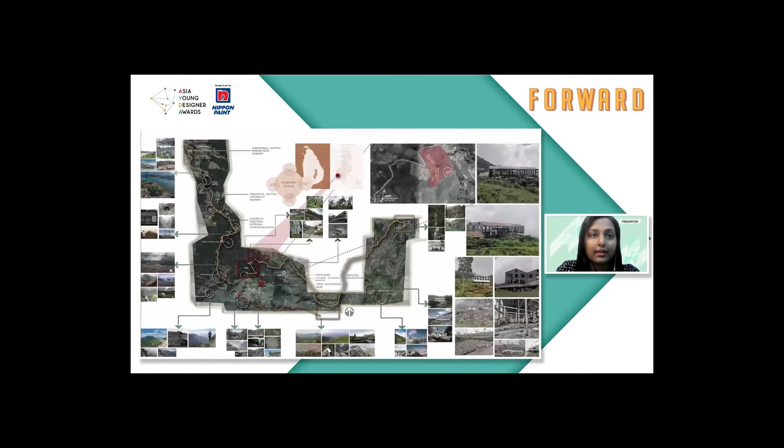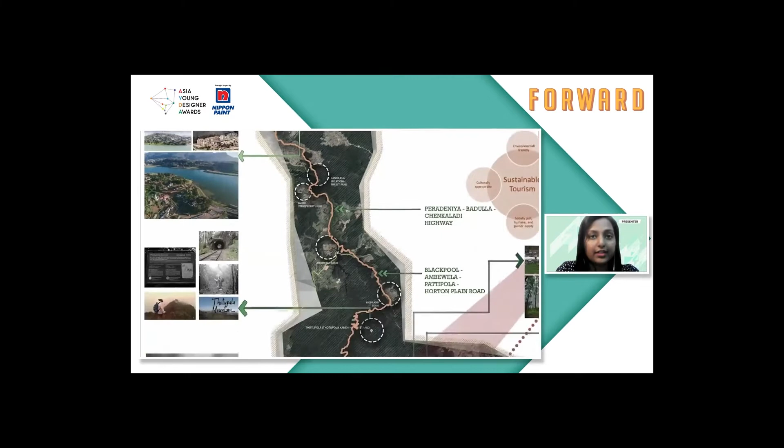The site is located in Ohiya within the Badulla district in Sri Lanka. Ohiya lies between Nuwara Eliya, Haputale, and Ella, which are popular tourist destinations. The site is located between Nuwara Eliya and Haputale and is close to Ohiya railway station, near many tourist destinations in the area.

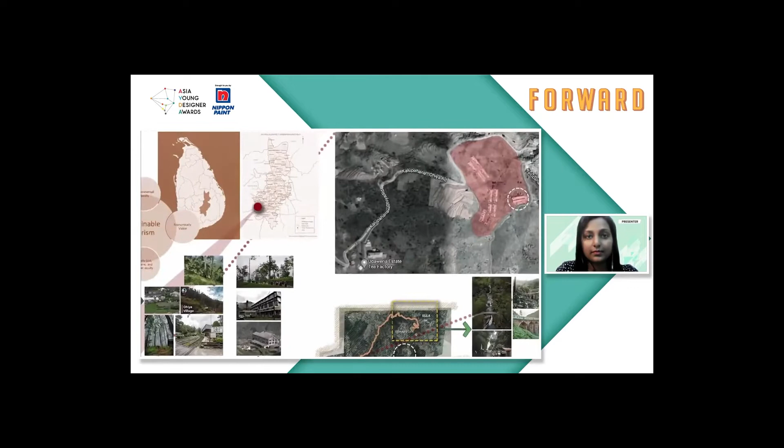The site consists of an abandoned tea factory and existing line houses. The project will be implemented and funded by Lankan Ceylon PLC and the Ministry of Plantations. Their primary objective would be to uphold the standards required to maintain the project. However, all components will be implemented and maintained by the community.

The concept of a rural biotope is implemented in the project to conserve a rural tea estate with an abandoned tea factory, following ecological and socio-cultural concepts.

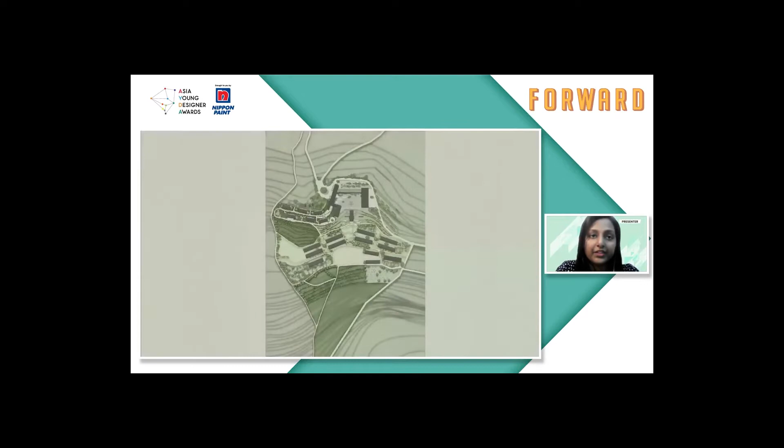The co-living community hub in Ohiya consists of three components: an upcycled tea factory, a tourist facility center with 30 chalets, and areas of existing line houses that are redesigned and retrofitted with homestay facilities.

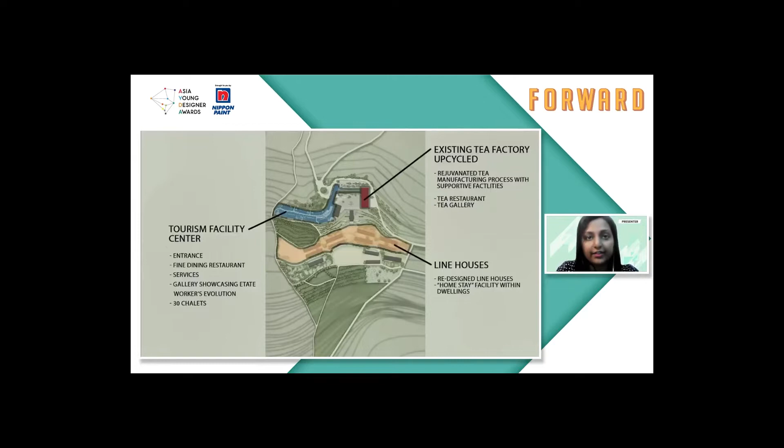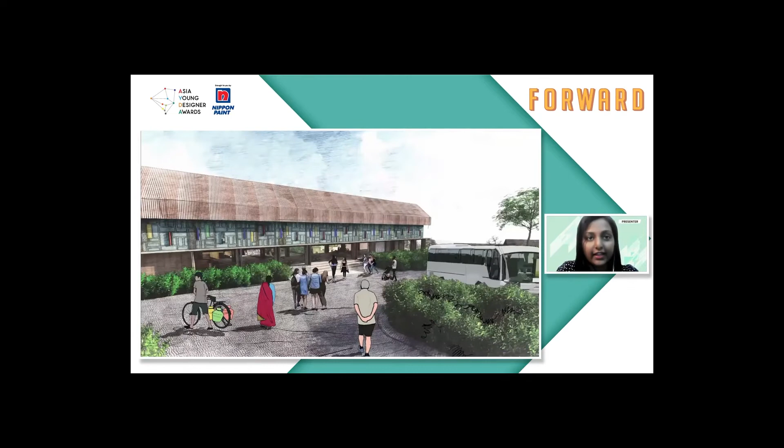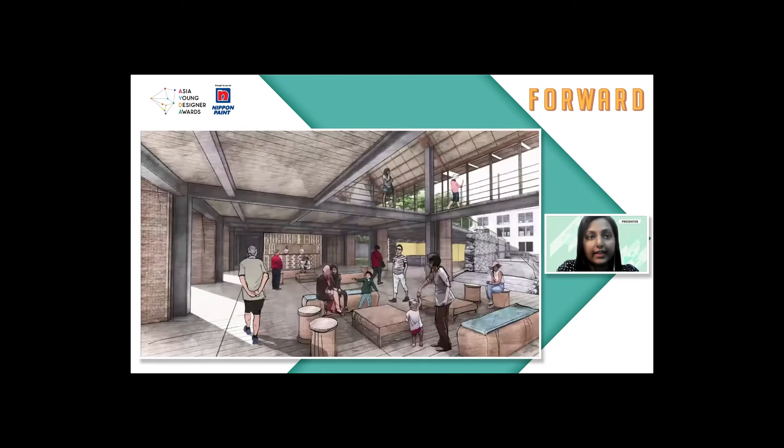The design of the building is inspired by the line houses seen in the estates. Some spatial principles followed in the design have also been derived from the existing line houses. The main entrance to the facility is through an entrance square that leads to the tourism facility center. The design provides a strong visual connection into interior regions due to the narrow open floor plan design and porous external envelope.

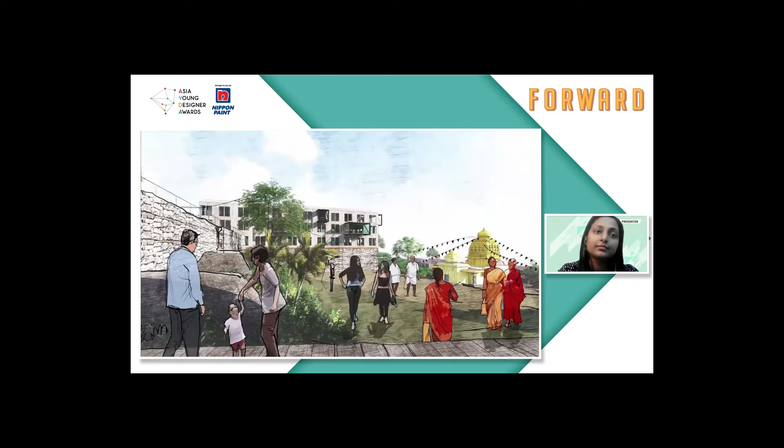The Tourism Facility Center is linked to the abandoned tea factory by a cultural gallery, which is a transition building. It facilitates a smooth transition and showcases the evolution and culture of the hidden estate community.

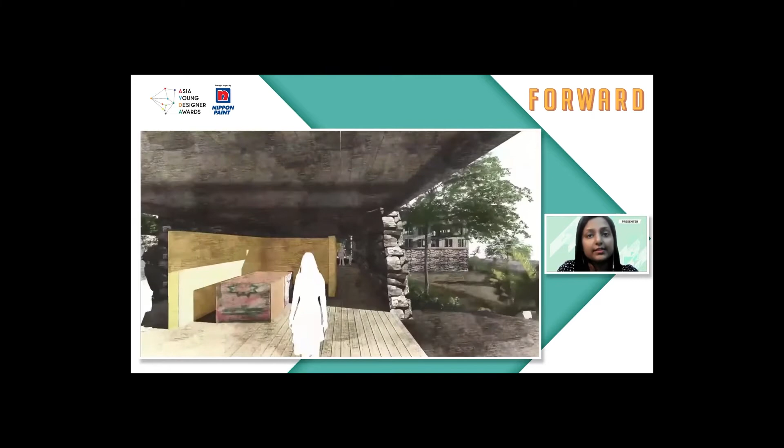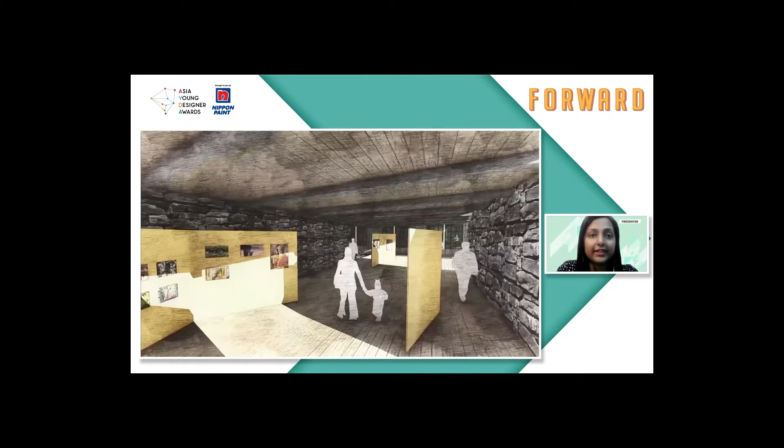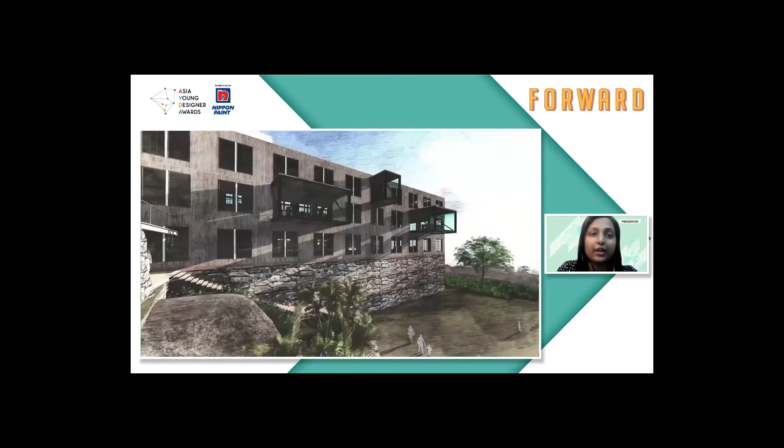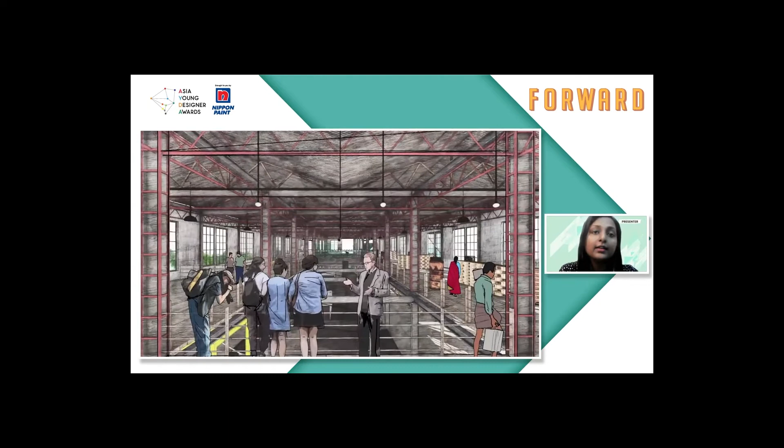The existing abandoned tea factory is upcycled into a carefully designed tea manufacturing and promoting unit. This provides visitors a museum-like experience and a safe, sound working environment for the estate workers. The feature enables visitors to experience tea production uniquely, from plucking, processing, packing, and tasting the final product at a tea restaurant. Projected boxes are included in the design to facilitate these additional spaces.

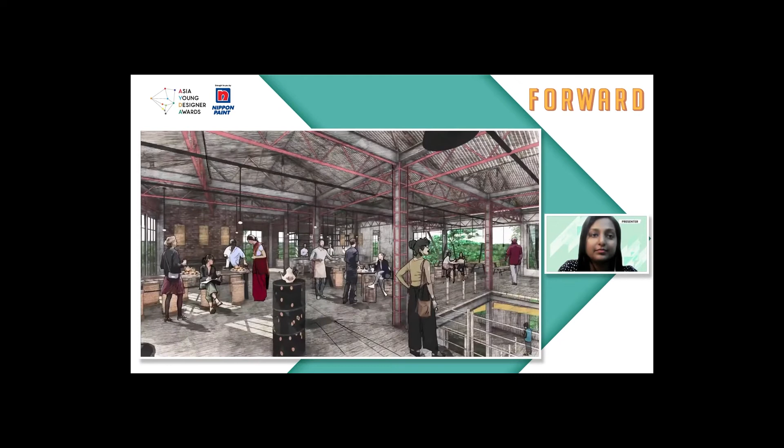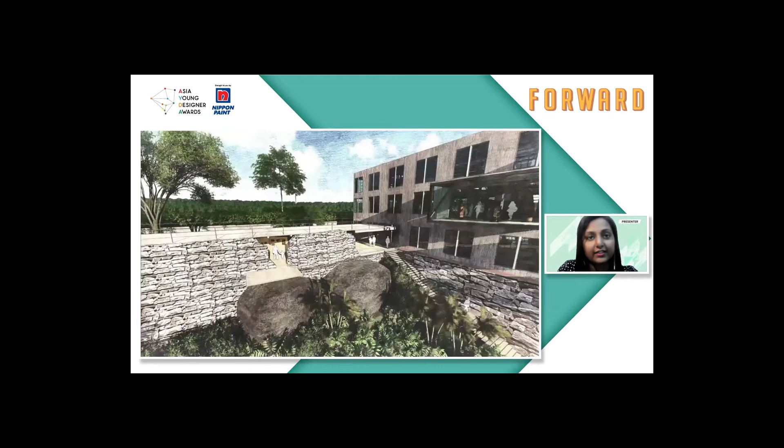The site also contains an existing Hindu shrine. This is the central design element across which public spaces are connected to each other via physical and visual links.

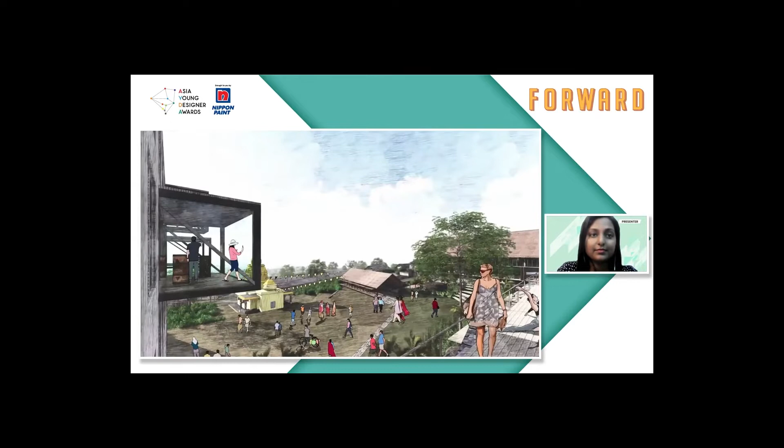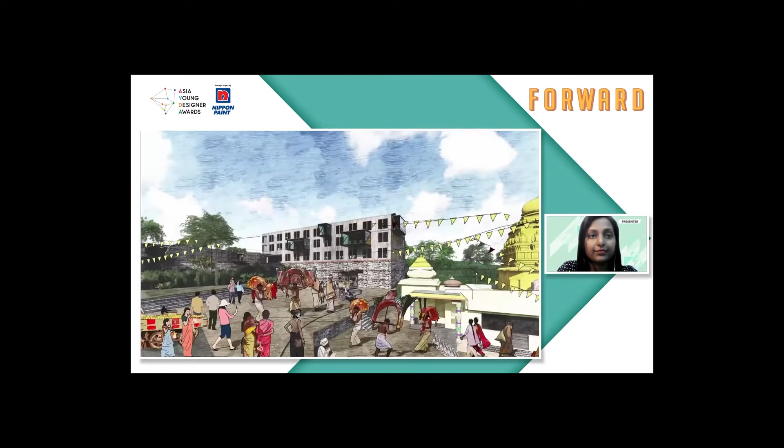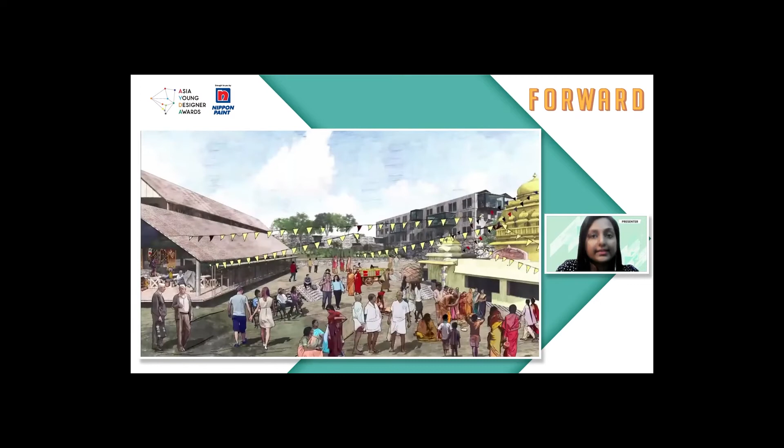The site also contains a demonstration space where a market will take place twice a week. It can also be used as a place for performances, pongal activities, etc. It can also be used by the community to engage in arts and crafts and as a space for learning activities such as cookery classes for tourists and language classes for the community people.

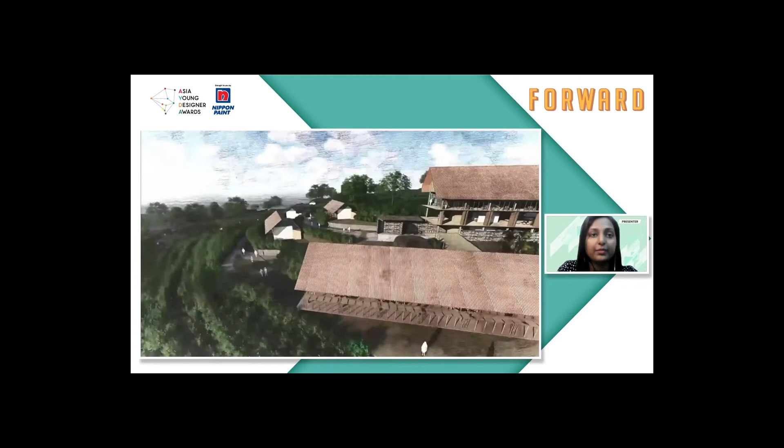30 chalets are present, forming the second purpose of the spatial provision. The cluster of chalets are carefully oriented to capture the best internal and external views of the context and provides the line house experience through its design. This can be considered the anticlimax of the spatial progression. Complementary components such as medicinal sauna and herbal spa are also included in this scheme.

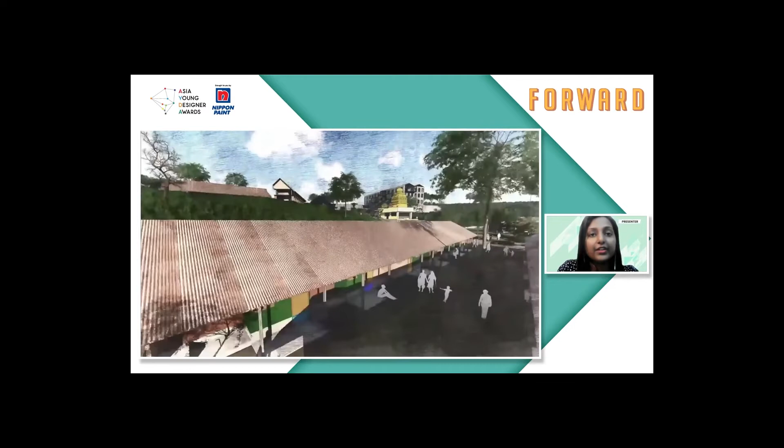Last but not least, a selected area of existing line houses currently occupied by some of the estate Tamils is redesigned and retrofitted with homestay facilities for the visitors. This will be an additional income source to the community. Spatial provision of the scheme is derived not only from the functionality of the spaces within, but also the contoured terrain and the picturesque views.

The project can form the basis for improvement of all tea estate plantations. Therefore, by emulating this concept in other areas, the tea industry will undergo an overall upliftment. This would improve export income from tea and increase the country's GDP, and most importantly, improve the lives of the tea estate community by improving their socio-economic status and standards of living.

This slide shows the color usage of the project. Vibrant colors have been used in the design to showcase the culture of estate Tamils. It gives a unique identity to the spaces and to the project as a whole. Simple colors such as black, dark brown, and gray shades balance the rusticness of the interior spaces and help create the required ambience.

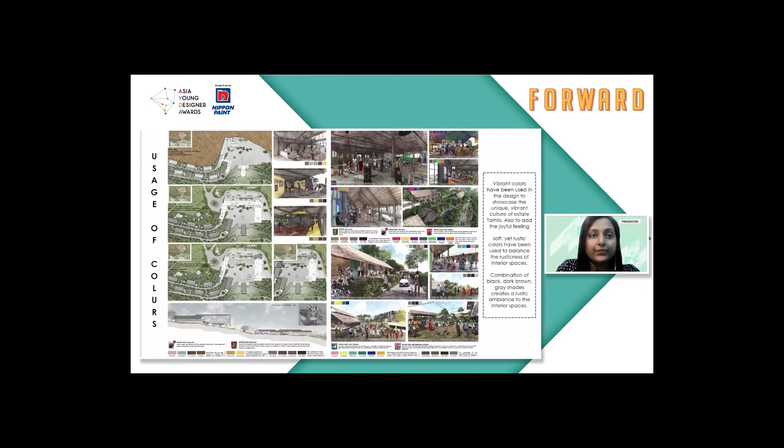This slide shows the sustainability practices that have been incorporated in the project. Sustainability approaches and sustainable concepts for services have been used throughout the process of designing, construction, and maintenance.

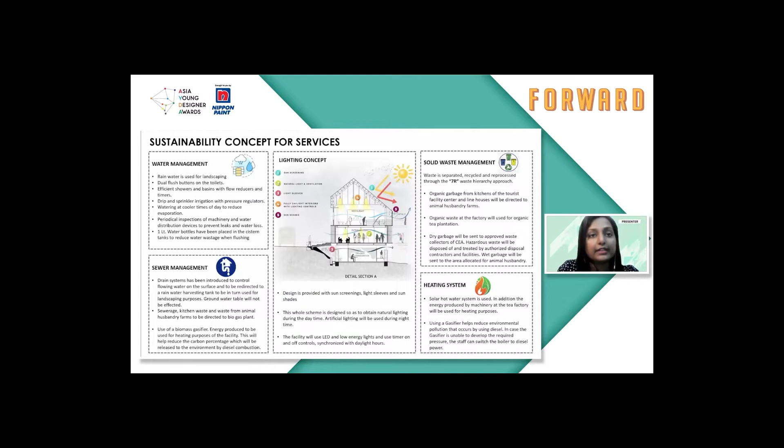The project incorporates sustainable components such as solar power generation, rainwater harvesting, a biomass gasifier, and a biogas plant. The energy generated is also provided for the consumption of the community. The project is also designed with energy-saving practices to minimize the wastage of water and electricity, etc.

The design uses locally sourced materials whenever possible, such as microtimber, bamboo, cane, lath and plaster walls, and rubber. Reused materials such as doors and windows from existing line houses have been used for decorative purposes and help showcase the estate workers' hidden struggle. Used tires and barrels have been used to build retaining walls, and railway sleepers have been used for decks.

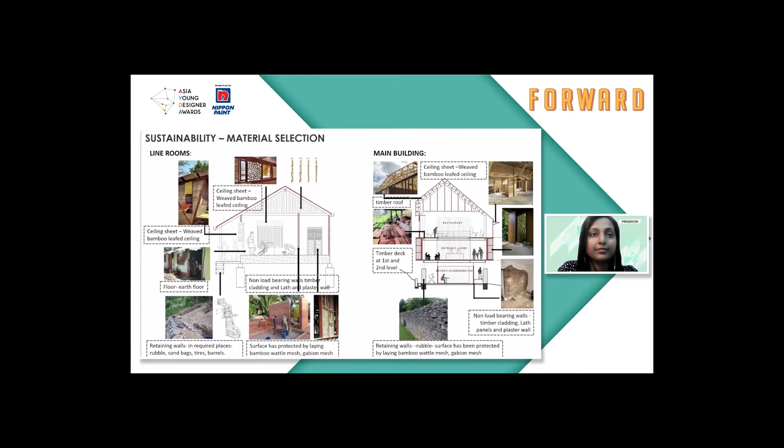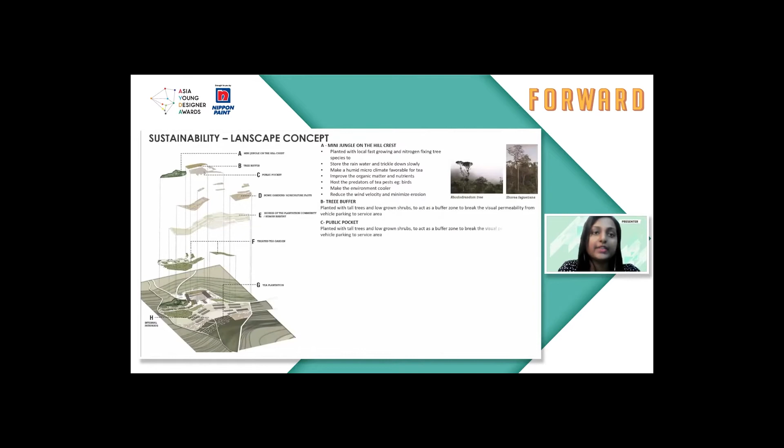The design has been achieved through minimum damage to its existing terrain. The site is divided into different segments, identifying both the natural condition of each area and its proposed activity, and has been treated accordingly. Both soft and hard landscaping is done to merge the man-made landscape with the natural context seamlessly.

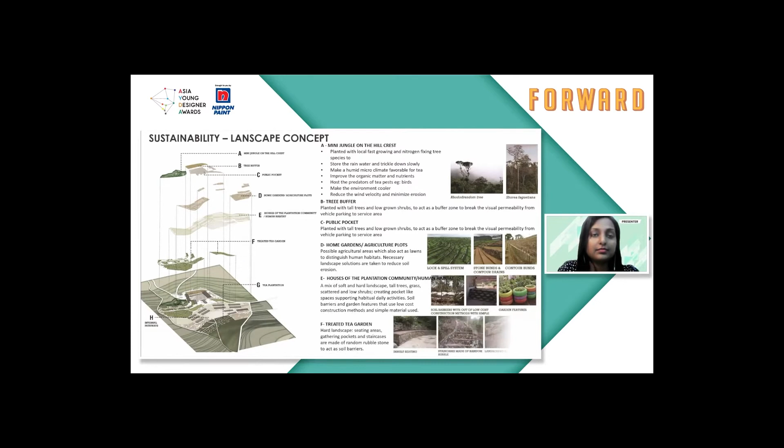The project has achieved environmental sustainability throughout all phases of the project process. The design has been done complementing the existing terrain and following necessary guidelines, while also enhancing the natural environment. Building construction and operation has been done with minimum energy consumption and with the usage of eco-friendly materials.

The abandoned tea factory, which could have been a negative impact to the surrounding, is renovated and reused. Drainage systems have been introduced to control flowing water on the surface and has been harvested accordingly. Sewage, kitchen waste, and waste from animal husbandry farms have been directed to the biogas plant.

By integrating these concepts of this pilot project in other areas, the tea industry will undergo an overall upliftment. This would translate to an increase in export income and thereby help increase the country's GDP. This project is also an architectural attempt to uplift the socio-economic status and standards of living of upcountry estate tenants through the provision of facilities that they are currently lacking. Consequently, this helps to create community empowerment, which ultimately is a social investment.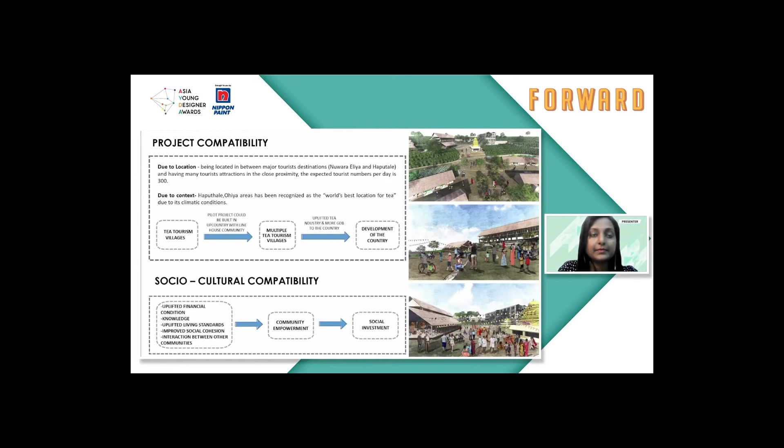Self-sustainable rural villages merged with tourism is seen as one of the most promising sectors for the development of domestic tourism in the Asian context. The pandemic has highlighted the ease at which disease spreads in densely populated areas across the globe. Potential food and supply shortages and travel restrictions due to the pandemic have most people considering a shift to a self-sufficient lifestyle. Therefore, self-sufficient villages can be seen to be safer and sustainable in the long run due to the ease at which the spread of disease can be controlled, and ease of management and distribution of resources.